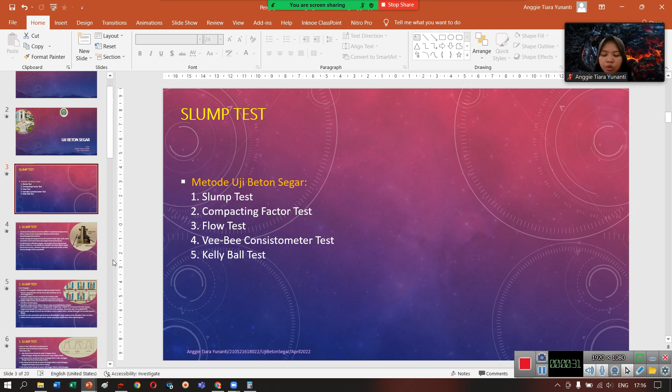Untuk pengujian yang pertama yaitu slump test. Slump test ini merupakan salah satu pengujian yang dapat digunakan untuk pengujian kemampuan kerja dari campuran beton yang baru dan dapat dilakukan di lokasi kerja, lapangan, atau laboratorium.

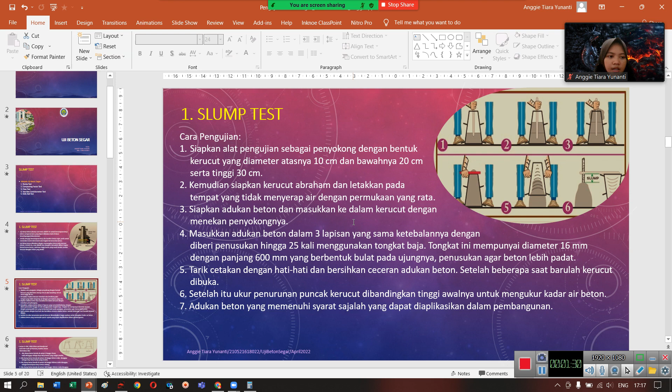Untuk prosedur dari pengujian slump test ini dapat dimulai dengan mempersiapkan alat seperti kerucut Abrams, tongkat besi, dan juga meteran. Setelah mempersiapkan peralatan yang dibutuhkan, kemudian campuran dari beton yang baru dimasukkan ke dalam kerucut Abrams hingga permukaan atas. Namun ketika campuran beton mencapai ketinggian 1/3, 2/3, dan 3/3, maka dilakukan pemadatan menggunakan tongkat besi sebanyak 25 kali. Setelah mencapai permukaan dan setelah diratakan, kerucut Abrams kemudian diangkat dan hasil dari slump beton tersebut kemudian diukur menggunakan meteran terhadap kerucut Abrams, ketinggian kerucut Abrams.

Kemudian untuk yang selanjutnya adalah kualitas dari beton itu ditentukan sesuai dengan IS 456-2000 atau Plain and Reinforced Concrete Code of Practice, di mana kriteria dari kualitas beton tersebut ditentukan menjadi 4.

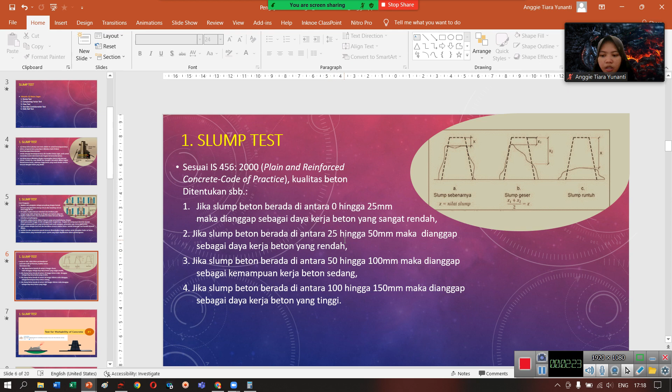Untuk yang pertama adalah jika slump beton berada di antara 0 hingga 25 mm, maka dianggap sebagai daya kerja beton yang sangat rendah. Untuk yang kedua adalah jika slump beton berada di antara 25 hingga 50 mm, maka dianggap sebagai daya kerja beton yang rendah. Kemudian yang ketiga adalah jika slump beton berada di antara 50 hingga 100 mm, maka dianggap sebagai kemampuan kerja beton sedang. Dan yang terakhir adalah jika slump beton berada di antara 100 hingga 150 mm, maka dianggap sebagai daya kerja beton yang tinggi. Kemudian yang selanjutnya ada video mengenai uji slump test pada beton.

Concrete slump test. Concrete slump test ini berarti pengujian slump test pada beton. Concrete itu beton, slump test itu slump test.

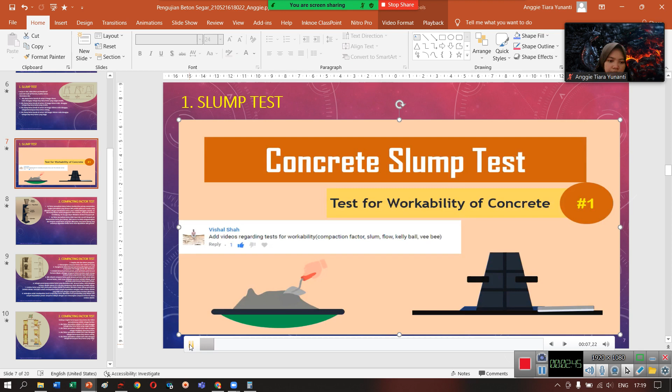Slump test is the most commonly used method of measuring the consistency of concrete work where the nominal maximum size of the aggregate does not exceed 38 millimeters.

This method can be employed either in the laboratory. Nah, jadi slump test ini bisa dilakukan di laboratorium atau di lokasi pekerjaan.

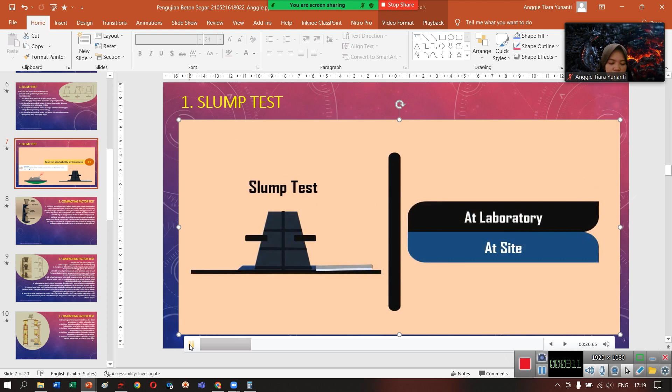Apparatus required for slump test. The mold for the test specimen is in the form of the frustum of a cone having the bottom diameter of 20 centimeters, top diameter 10 centimeters, and height of the cone is 30 centimeters. Jadi mold itu berarti cetakan, di mana cetakannya ini merupakan kerucut Abrams, di mana diameter dari sisi atasnya merupakan 10 cm, untuk diameter pada sisi bawahnya adalah 20 cm, dan ketinggian dari kerucutnya adalah 30 cm.

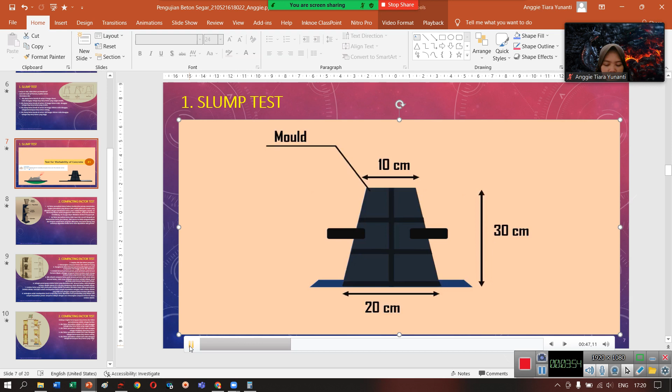A metal plate of thickness 1.6 mm is used as a base. Kemudian metal plate ini dilakukan sebagai base atau dasar, di mana kerucut Abrams ini untuk menguji slump test memerlukan permukaan yang rata dan tidak menyerap air, sehingga digunakan metal plate dengan ketebalan 1,6 mm.

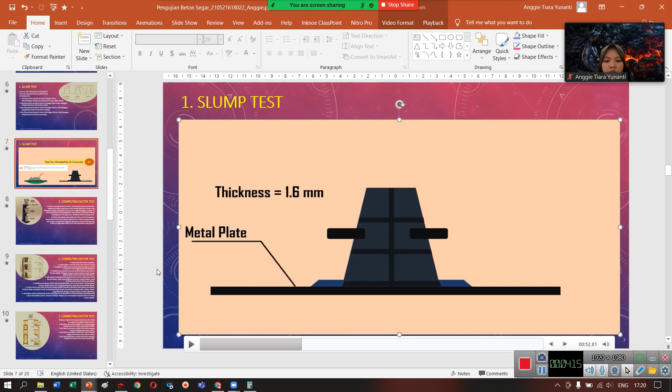A tamping rod of 16 mm diameter and 0.6 meters long is used. Kemudian ini adalah wujud dari tongkat besi, di mana tongkat besinya memiliki panjang 0,6 meter dan diameter sebesar 16 mm.

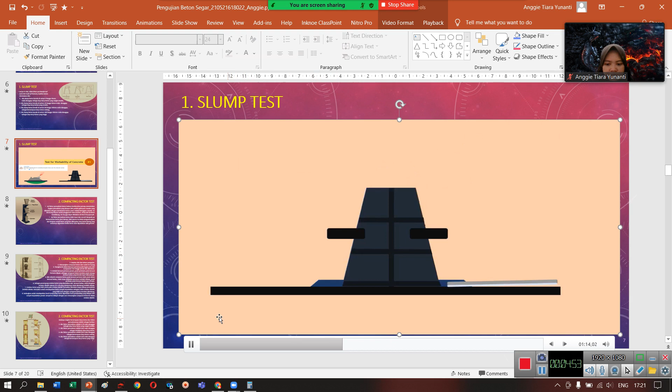Let us now see the step-by-step procedure for concrete slump test. The internal surface of the mold should be thoroughly cleaned and freed from moisture and any set concrete before commencing the test. Sebelum kerucut Abrams digunakan, perlu dibersihkan terlebih dahulu.

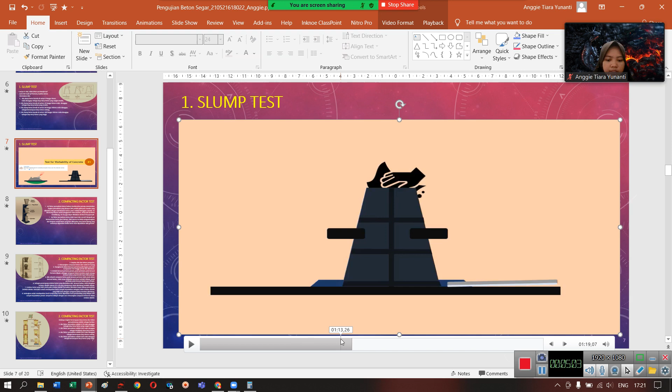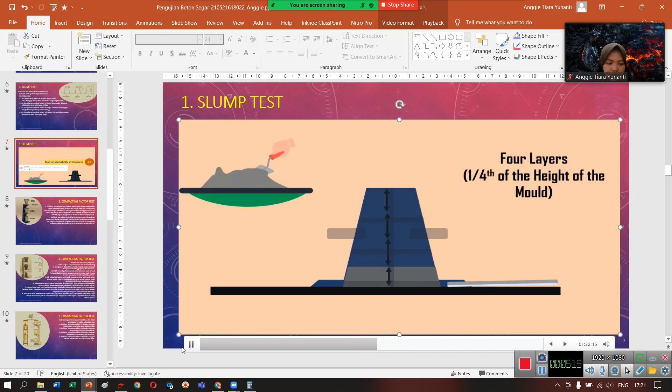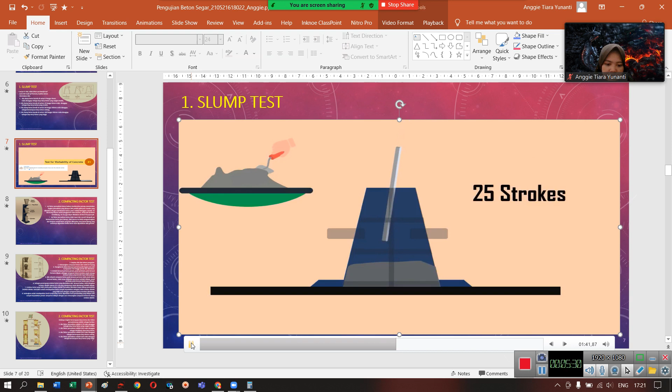The mold is placed on the smooth metal plate. The mold is filled in 4 layers, each approximately 1/4 of the height of the mold. Each layer should be tamped with 25 strokes with tamping rod, such that the strokes are distributed over the cross section. Dilakukan pemadatan sebanyak 25 kali. After the top layer is filled, the concrete is struck off level.

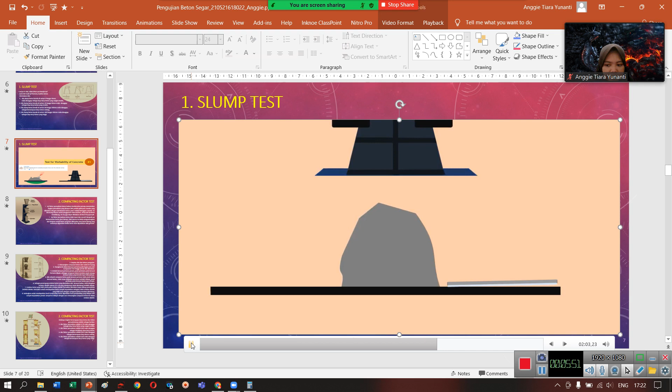The mold should be removed from the concrete by slowly raising in the vertical direction. Now, you will notice concrete tends to subside. This subsidence is referred as slump of concrete. Hasil dari pengukuran. This slump value is then measured by the difference of the height of the mold and that of the highest point of the specimen. This difference in height is taken as slump of concrete.

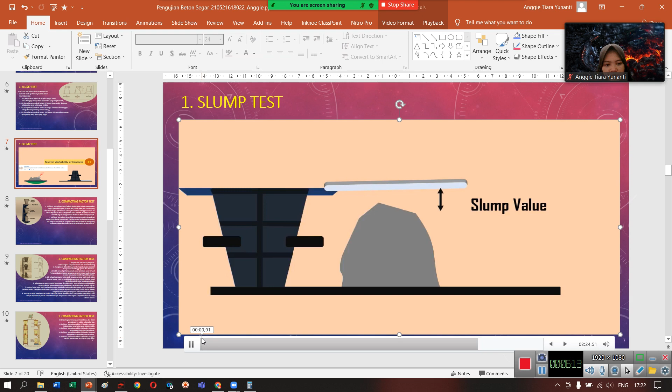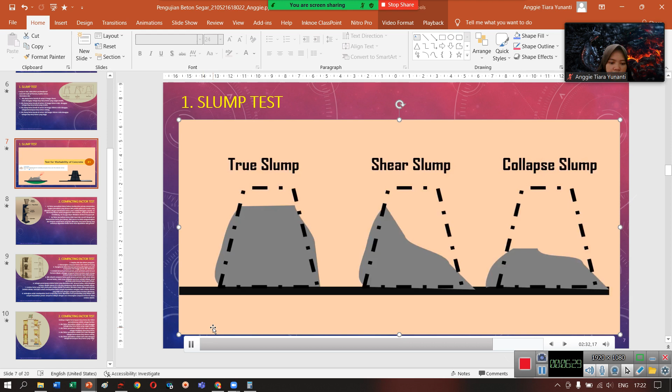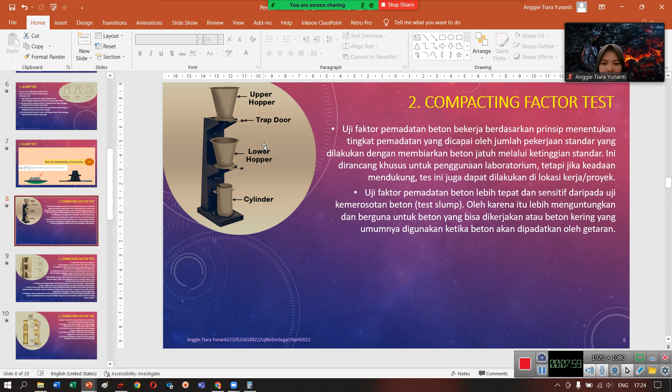Jadi alat dari compacting factor test ini seperti gambar di pojok kiri atas yang terdiri dari upper hopper, trapdoor, lower hopper, dan silinder. Pengujian akan dilakukan sebanyak 3 kali, dimulai dari memasukkan campuran beton ke dalam upper hopper, kemudian trapdoornya akan dibuka, betonnya akan jatuh kepada lower hopper, kemudian trapdoornya akan dibuka lagi dan masuk ke dalam silinder.

Yang selanjutnya adalah deskripsi tingkat kemampuan kerja beton dan faktor pemadatannya. Pertama, jika faktor pemadatan adalah 0,78 maka dianggap sebagai daya kerja beton yang sangat rendah. Kedua, jika faktor pemadatan adalah 0,85 maka dianggap sebagai rendahnya daya kerja beton. Ketiga, jika faktor pemadatan adalah 0,92 maka dianggap sebagai kemampuan kerja beton sedang. Dan terakhir, jika faktor pemadatan adalah 0,95 maka dianggap sebagai kemampuan kerja beton yang tinggi.

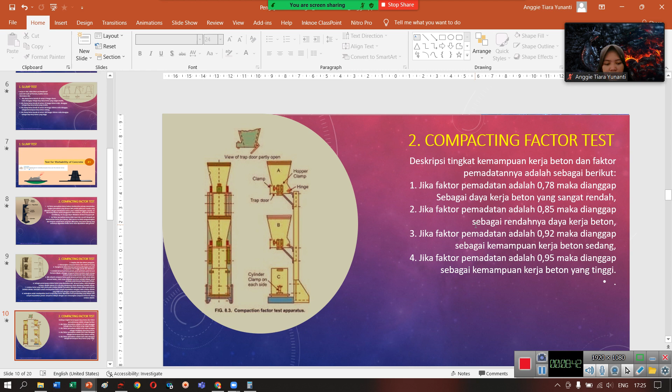Untuk yang selanjutnya adalah video mengenai pengujian menggunakan compacting factor test.

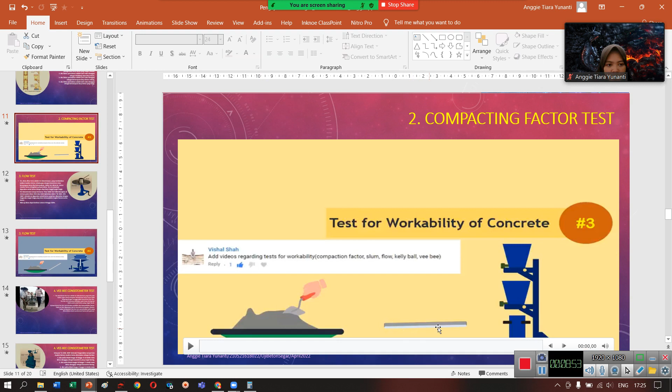Compaction factor test for concrete. The compaction factor test is designed generally for use in the laboratory, sometimes used in sites. Jadi, compacting factor test ini bisa dilakukan di laboratorium atau di lokasi pekerjaan.

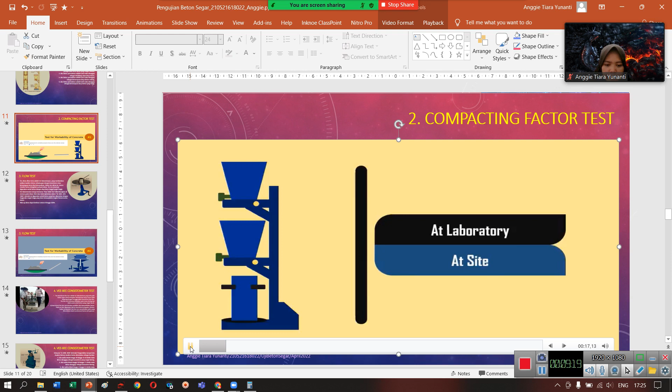This test has an advantage of using this method for concrete mixes of very low workability.

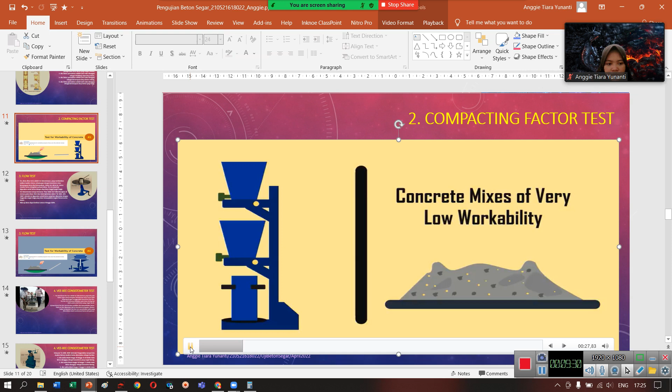The compaction factor apparatus consists of the upper hopper of dimensions: top internal diameter 25.4 centimeters, bottom internal diameter 12.7 centimeters, and internal height 27.9 centimeters. Jadi untuk hopper yang paling atas ini memiliki diameter atasnya 25,4 cm dan diameter bawahnya adalah 12,7 cm, untuk tingginya adalah 27,9 cm.

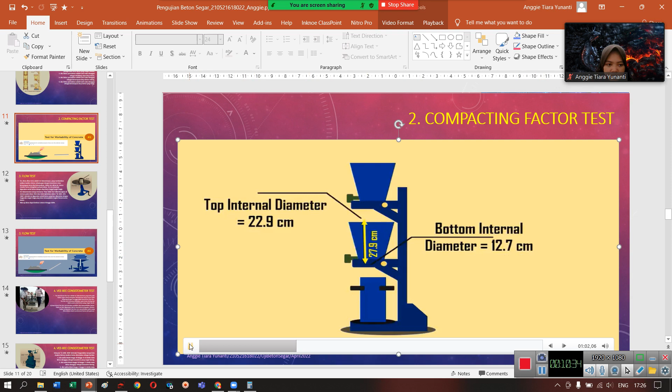A fixed lower hopper of dimensions: top internal diameter 22.9 centimeters, bottom internal diameter 12.7 centimeters, and internal height 22.9 centimeters. Untuk hopper yang di bawahnya ini memiliki diameter atas sebesar 22,9 cm dan diameter bawah sebesar 12,7 cm, sedangkan tingginya adalah 27,9 cm.

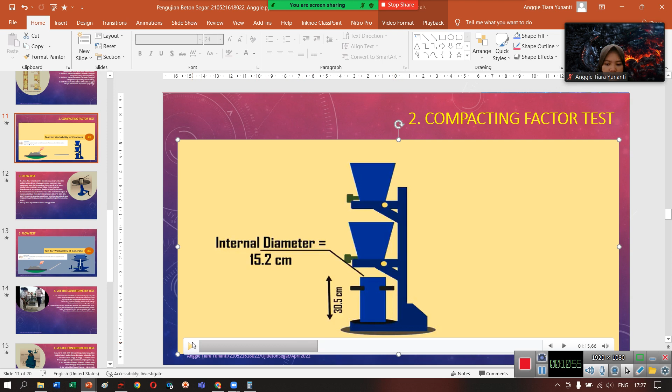And a cylinder of internal diameter 15.2 centimeters and internal height 30.5 centimeters. Untuk diameter dari silindernya sendiri adalah 15,2 cm, sedangkan tingginya adalah 30,5 cm.

The distance between upper and lower hoppers, and lower hopper and cylinder, is 20.3 centimeters.

Procedure: the sample of concrete to be tested is placed in the upper hopper up to the brim. Jadi prosedur dimulai dengan memasukkan campuran betonnya ke dalam upper hopper sampai penuh.

The trap door is opened so that the concrete falls into the lower hopper. Kemudian trapdoornya dibuka sehingga campuran betonnya masuk ke dalam lower hopper.

Then the trapdoor of the lower hopper is opened and the concrete is allowed to fall into the cylinder. Jadi, trapdoor untuk yang lower hopper kemudian dibuka sehingga campuran dari betonnya masuk ke dalam silinder.

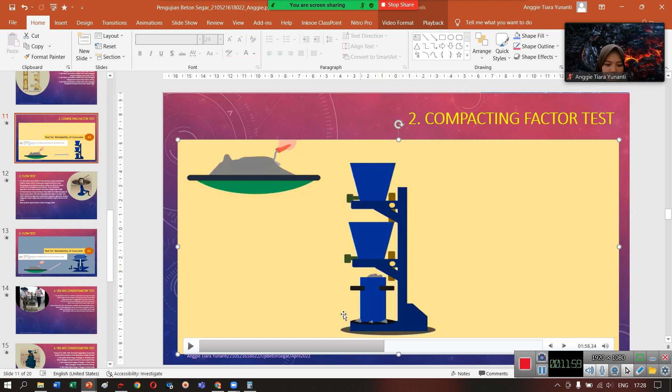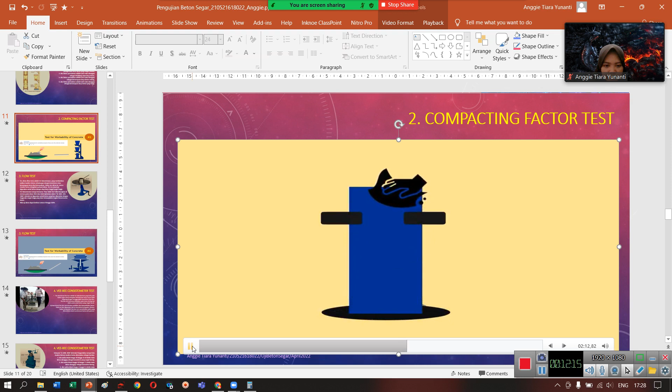The excess concrete in the cylinder is leveled. The outside of the cylinder is wiped clean. Now, the cylinder filled with concrete is weighed.

Jadi sebelum dilakukan pengujian ini, silindernya terlebih dahulu ditimbang untuk mengetahui beratnya. Kemudian setelah dilakukan pengujian, silinder dan campuran beton yang masuk ke silinder ini ditimbang, dan weight is known as the weight of partially compacted concrete.

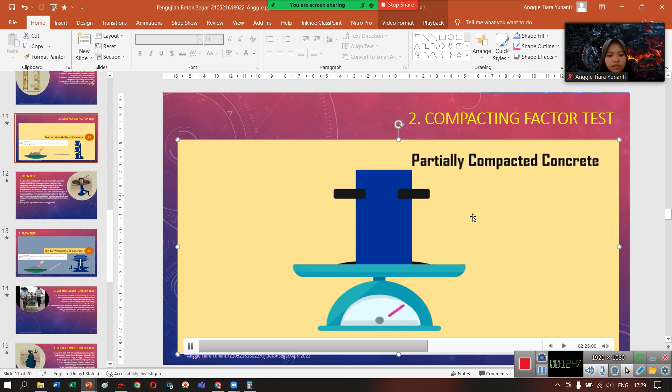Then, empty and clean the entire cylinder. Setelah ditimbang, beton yang masuk ke dalam silinder tadi dikeluarkan kembali dan kemudian diisi dengan campuran beton yang baru hingga silinder penuh.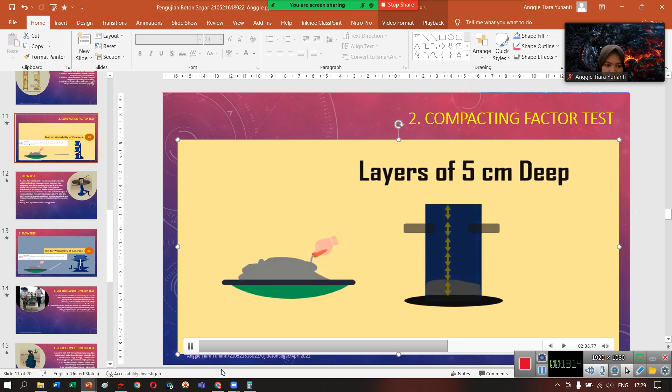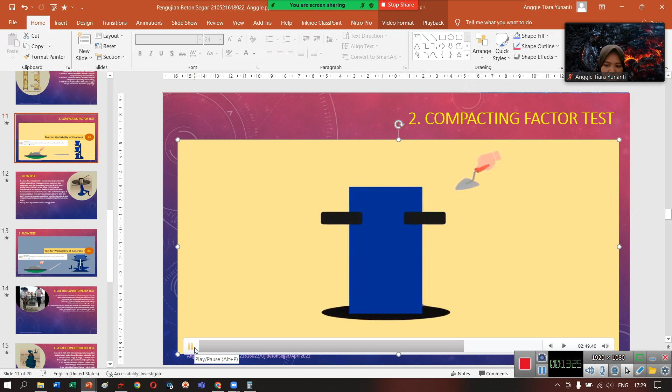Now, fill the cylinder with concrete in layers where each is approximately 5 centimeters deep. Once fully filled, the top surface is leveled off. The outside of the cylinder is wiped.

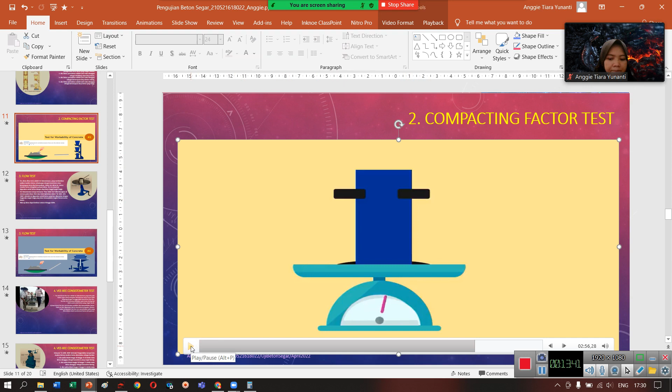Now, weigh the cylinder. Kemudian, setelah penuh, silinder yang berisi penuh dengan campuran beton ini ditimbang kembali. Weight is known as the weight of fully compacted concrete.

The compaction factor is equal to the ratio of the weight of partially compacted concrete to the weight of fully compacted concrete. Jadi compaction factor ini merupakan hasil dari berat pengujian beton silinder yang sebelumnya dilakukan dibagi terhadap berat silinder dengan beton yang penuh.

With the help of the compaction factor value, the degree of workability is calculated with the help of the table. Nah, ini merupakan klasifikasi.

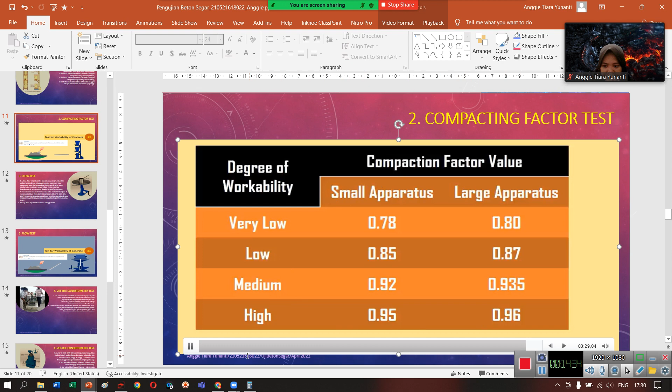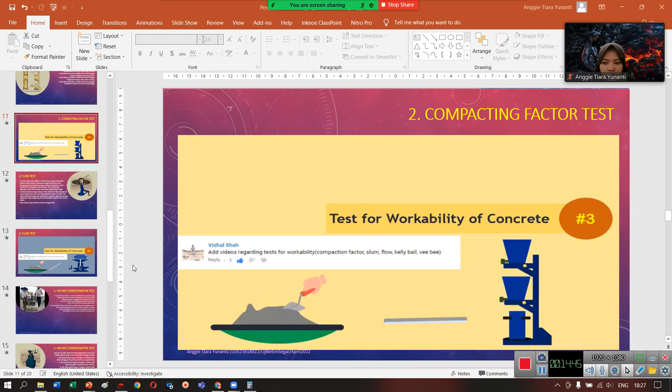Untuk yang selanjutnya yaitu pengujian ketiga, flow test, di mana flow test ini merupakan tes laboratorium yang memberikan indikasi kualitas beton sehubungan dengan konsistensi atau kemampuan kerja dan keterpaduan.

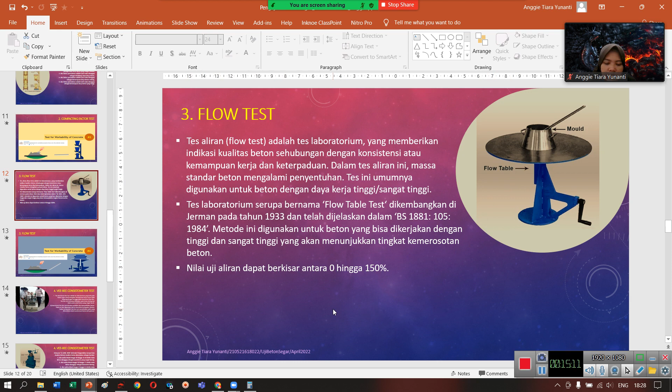Nilai uji dari tes flow test ini adalah antara 0 hingga 150%. Berikut merupakan video dari pengujian menggunakan flow test.

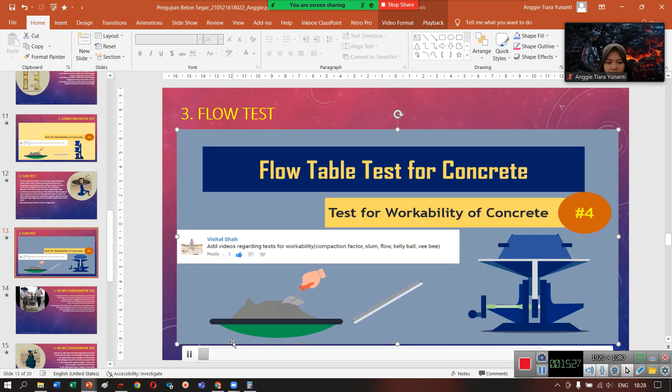Flow table test for concrete is generally done in the laboratory to determine the fluidity of concrete. Jadi flow test ini biasanya dilakukan di laboratorium.

The apparatus consists of molds made of smooth metal casting, in the form of a frustum of a cone with internal dimensions of 25 cm base diameter, 17 cm upper surface diameter, and height 12 cm. Jadi untuk mold atau cetakannya, diameter permukaannya adalah 17 cm, diameter dasarnya adalah 25 cm, sedangkan tingginya adalah 12 cm.

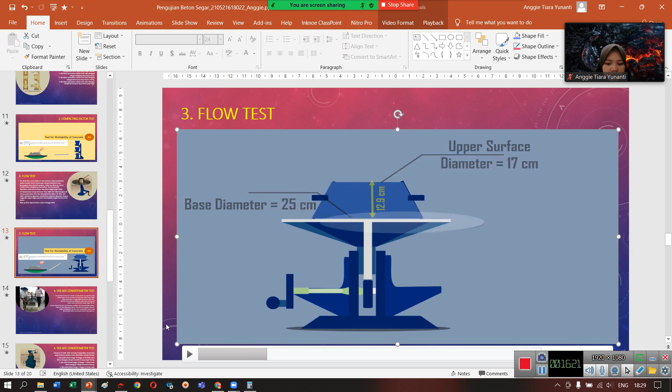And the flow table is about 76 cm in diameter, over which concentric circles are marked. Jadi untuk flow table tadi memiliki diameter 76 cm.

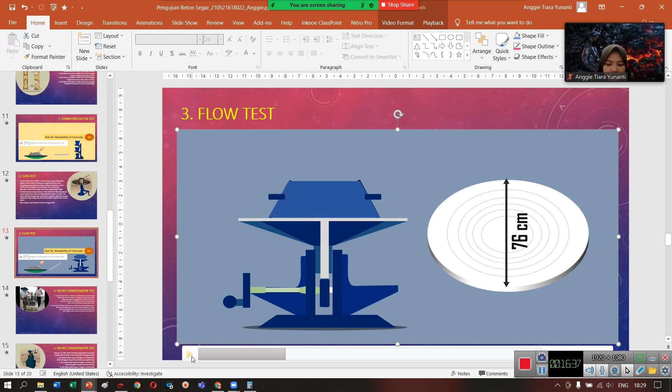Let's now see the step-by-step procedure to do this test. The tabletop is cleaned of all gritty material and is wetted. Jadi yang pertama adalah membersihkan flow table sebelum melakukan pengujian.

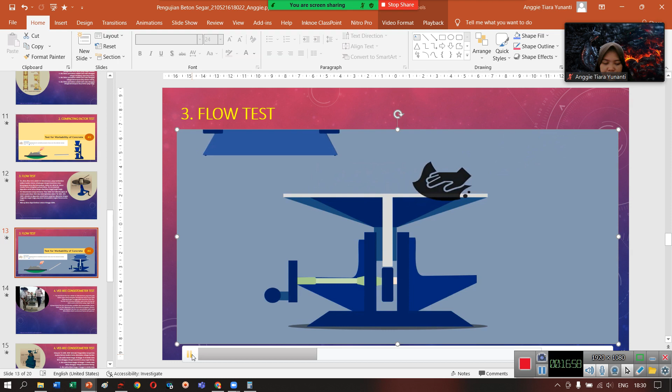The mold is placed in the center of the table. Kemudian meletakkan mold ini di tengah-tengah dari flow table.

Firmly held and filled in 2 layers. Kemudian memasukkan campuran beton ke dalam mold atau cetakan. Each layer is rodded 25 times with a tamping rod. Cara memasukkannya yaitu jika ketinggian dari campuran betonnya mencapai setengah dari ketinggian moldnya, maka dilakukan pemadatan sebanyak 25 kali menggunakan tongkat besi. After fully filled, the excess concrete is leveled off.

Now, lift the mold vertically upward. You will notice concrete stands in the shape of the mold. Kemudian kerucutnya diangkat. The table is then raised and dropped 12.5 mm, 15 times in about 15 seconds. Jadi alatnya dinyalakan sehingga menghasilkan getaran, di mana getarannya adalah 15 kali dalam 15 detik.

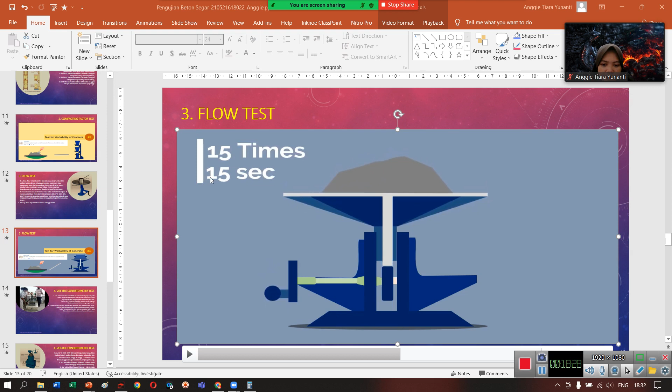The diameter of the concrete spread is measured in about 6 directions to the nearest 5 mm and the average spread is noted. Jadi cara menghitungnya yaitu bentuk akhir dari campuran beton yang telah dilakukan getaran kemudian dibagi menjadi 6, kemudian dihitung diameter luarnya berapa, diameter totalnya dikurangi dengan diameter luarnya, maka didapatkan diameter dari campuran betonnya.

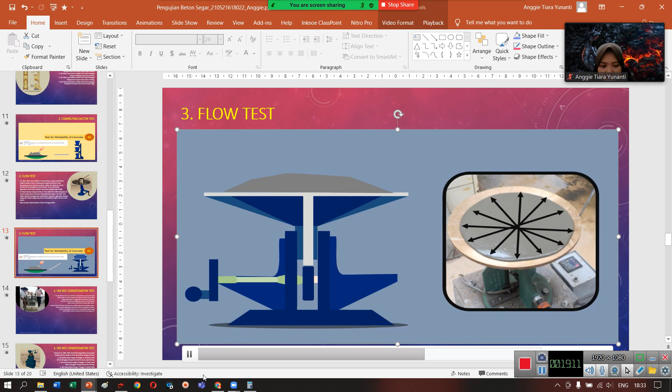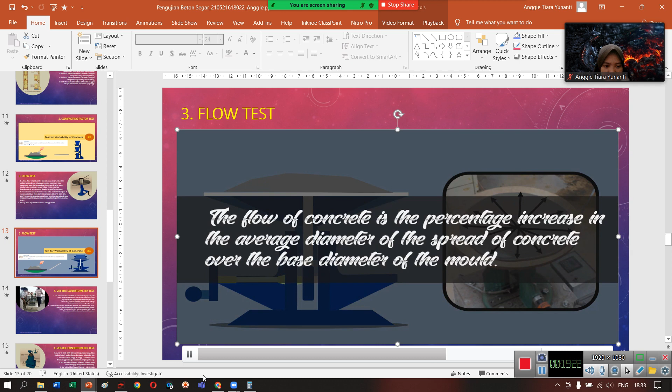The flow of concrete is the percentage increase in the average diameter of the spread of concrete over the base diameter of the mold. Flow in percent is calculated by dividing spread diameter in centimeters minus 25, divided by 25, into 100. Jadi hasil dari flow test ini sama dengan diameter total dari campuran betonnya tadi dikurangi dengan 25, dibagi 25, dikalikan 100.

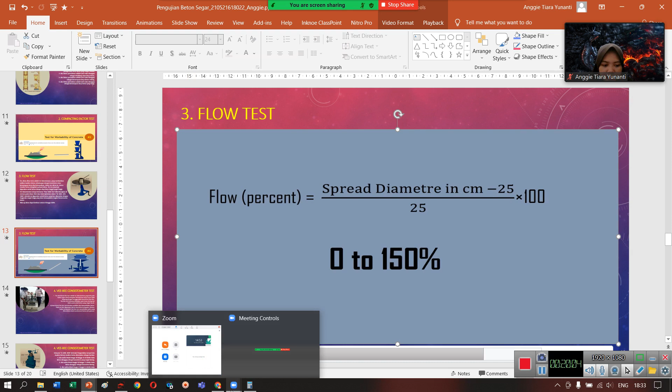Thus, the value of flow percent is calculated from 0 to 150%. Nanti akan menghasilkan angka antara 0 sampai 150%. A close look at the pattern of spread of concrete can also give a good indication of the characteristics of concrete, such as the tendency for segregation.

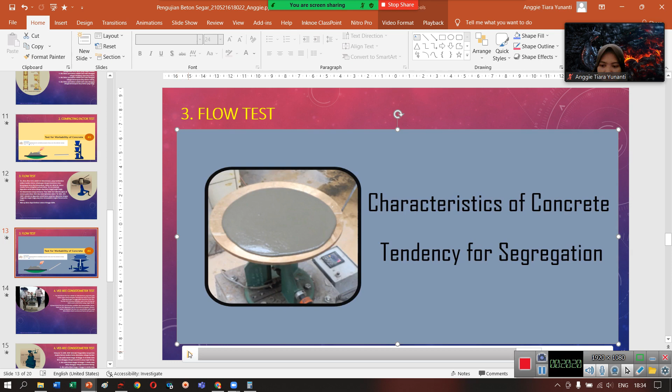Kemudian untuk yang selanjutnya ada Vee-Bee consistometer test, di mana tes konsistensi Vee-Bee adalah tes laboratorium yang baik pada beton segar yang digunakan untuk mengukur kemampuan kerja secara tidak langsung dengan menggunakan konsistensi Vee-Bee. Vee-Bee test biasanya dilakukan pada beton kering dan tidak cocok untuk beton yang sangat basah, di mana uji konsistensi Vee-Bee ini digunakan untuk menentukan mobilitas dan kompatibilitas beton.

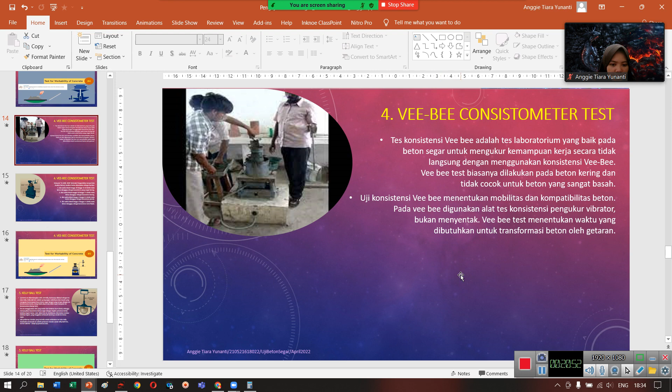Yang selanjutnya adalah kualitas beton yang ditentukan menurut IS 1199-1959, metode pengambilan sampel dan analisis beton. Jika waktu lebah hingga 20 hingga 15 sampai 10 detik, maka beton dianggap sebagai konsistensi yang sangat kering. Jika waktu lebah hingga 10 hingga 7 sampai 5 detik, maka beton dianggap sebagai konsistensi kering. Jika waktu lebah hingga 5 hingga 4 sampai 3 detik, maka beton dianggap sebagai konsistensi plastik. Dan yang terakhir, jika waktu lebah hingga 3 hingga 2 sampai 1 detik, maka beton dianggap sebagai konsistensi semi fluida.

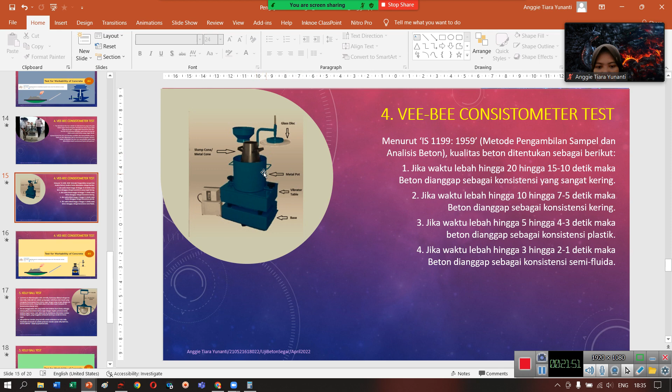Untuk alat dari Vee-Bee consistometer test ini terdiri dari glass disc, slump cone atau metal cone, metal pot, vibrator table, dan base. Kemudian selanjutnya adalah video mengenai pengujian Vee-Bee.

Vee-Bee consistometer test for concrete. Vee-Bee consistometer test is used to determine the mobility and compactability of concrete. Jadi Vee-Bee consistometer test ini digunakan untuk menguji mobilitas dan kompatibilitas dari beton.

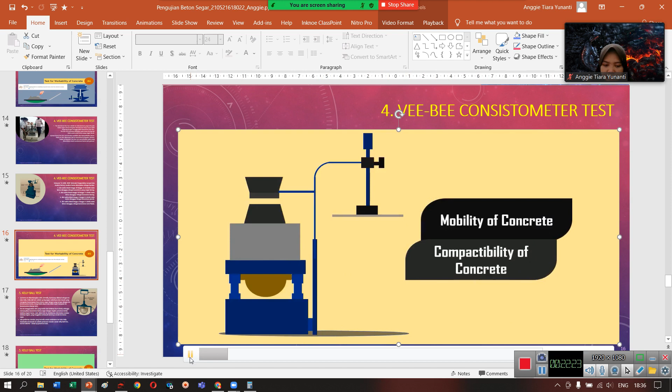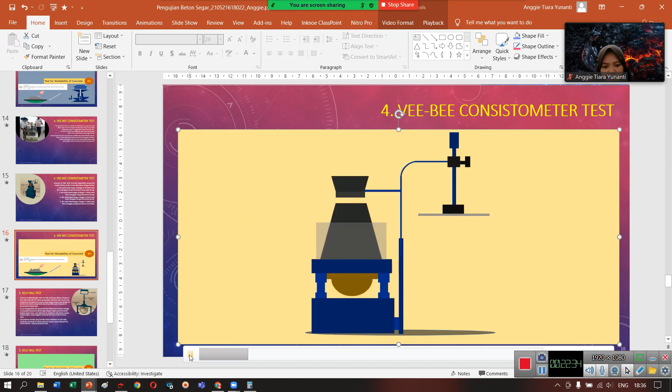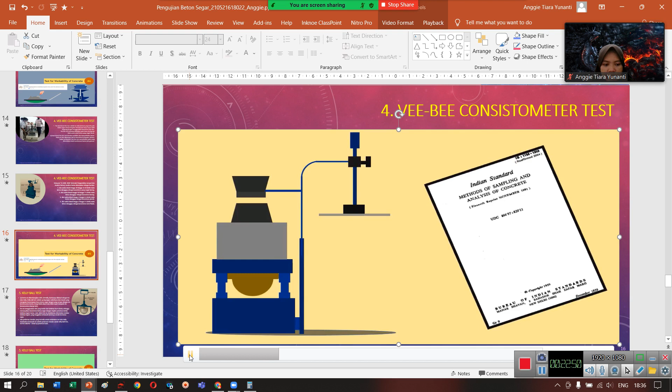The Vee-Bee consistometer test consists of a vibrator table resting upon elastic supports, a metal pot, a sheet metal cone open at both ends, and a graduated rod connected with a glass disc. The entire setup is shown on the screen. The dimensions of the various shapes are designed based on IS 1199-1959. Today, we are not going to concentrate on dimensions. Let us now start with the procedure. Place the slump cone inside the cylinder.

Sebelumnya slump cone ini ditaruh di dalam silinder yang ada di sini, kemudian dimasukkan campuran beton. Fill the concrete in 4 layers. Jadi pengisian dari kerucut betonnya ini dilakukan sebanyak 4 kali, di mana ketika ketinggian dari campuran betonnya mencapai 1/4 dilakukan pemadatan.

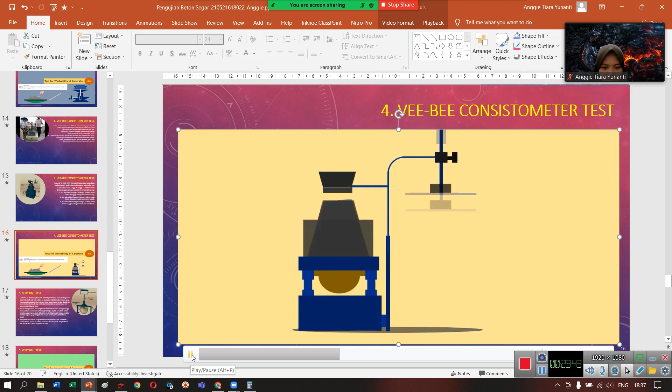1/4 of cone height and tamper the surface 25 times. Once filled, struck off the excess concrete. Move the glass disc attached to the swivel arm and place it on the slump cone such that it touches the top of the concrete level.

Note down the reading in the graduated rod. Jadi untuk glass disc-nya kemudian diarahkan ke permukaan dari cone-nya, kemudian dilihat skala yang ada pada alat.

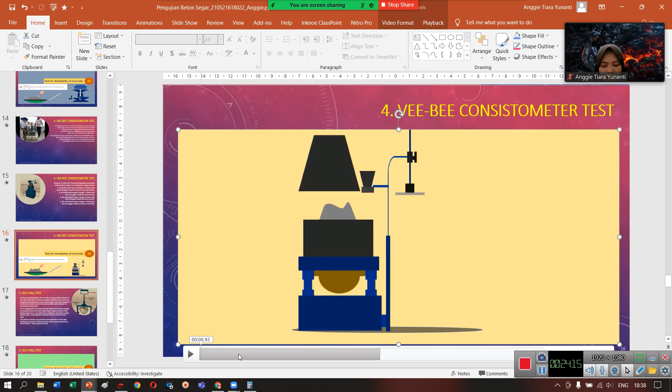Next, remove the cylindrical cone by raising the cone slowly in the vertical direction. Kemudian melepaskan cone-nya.

Again, place the glass disc and determine the reading. Kemudian menempatkan si glass disc-nya ini ke atas dari permukaan beton yang telah dilepaskan dari cone, kemudian melihat skalanya yang ada pada alat.

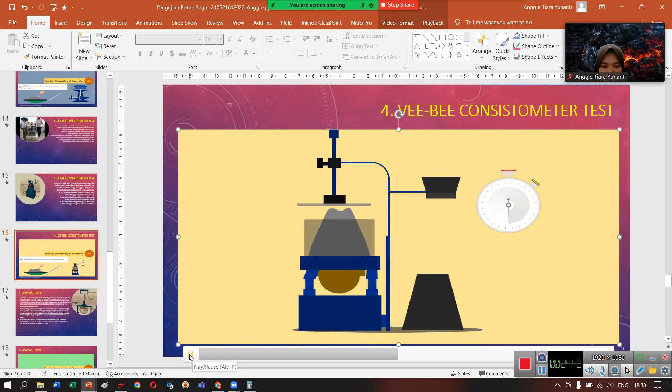Now, switch on the electrical vibrator and at the same time switch on the stopwatch. Jadi kemudian alat vibratornya dinyalakan dan sambil menghitung menggunakan stopwatch.

Concrete will start to spread in the cylinder container. Continue the vibration until the concrete is remolded and the surface of the concrete becomes horizontal. Jadi pengujian ini, penghitungan waktu dilakukan sampai permukaan beton yang ada pada silinder ini menjadi horizontal atau rata.

Stop the vibration and stopwatch. Kemudian menghentikan stopwatch untuk melihat waktu. The time in the stopwatch denotes the workability of concrete, expressed in Vee-Bee seconds.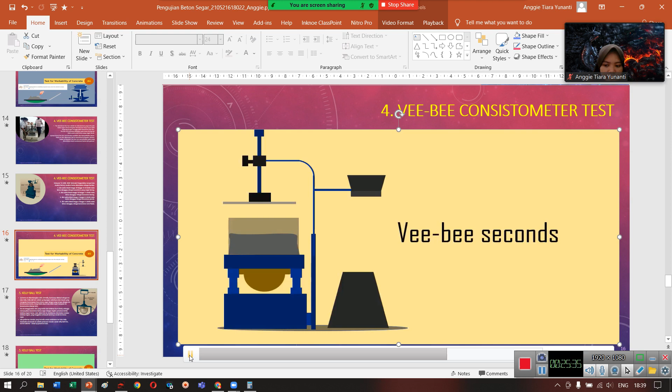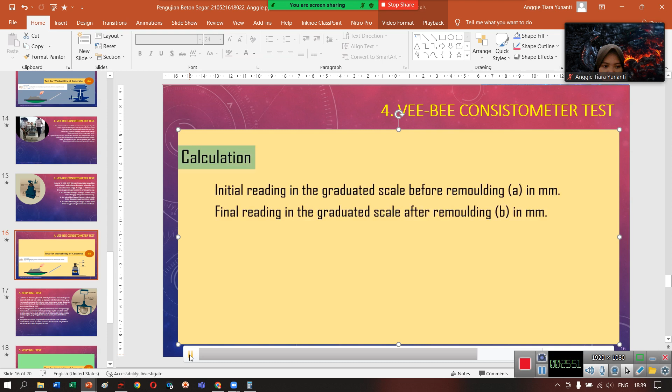Calculations in Vee-bee consistometer. Initial reading in the graduated scale before remolding is A. Final reading in the graduated scale after remolding is B. Slump value is equal to A minus B.

Jadi nilai dari slumpnya ini A dikurangi B dalam milimeter, di mana A ini adalah skala yang tertera pada alat ketika pengukuran dilakukan pada saat konnya belum diangkat. Kemudian yang B adalah pada slump yang sudah diangkat.

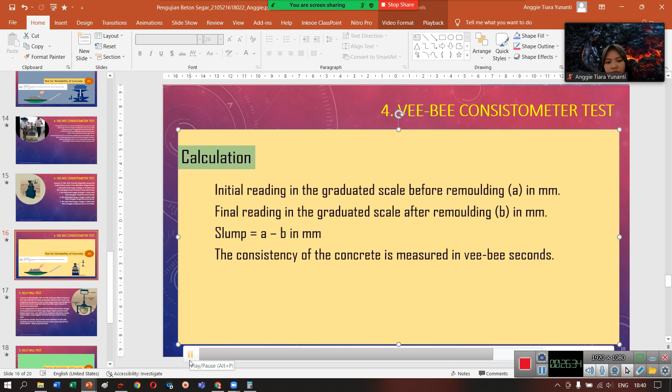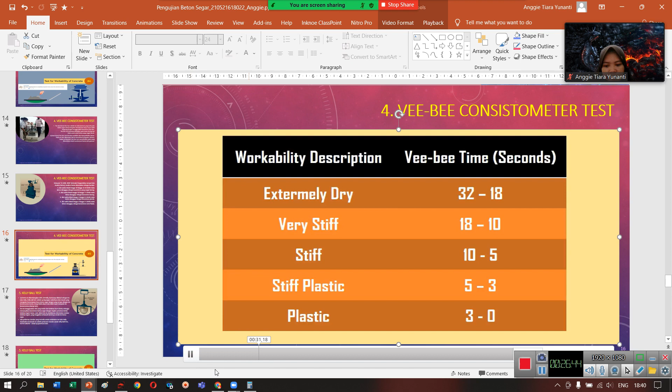And the consistency of the concrete is measured in Vee-bee seconds. The workability conditions with respect to Vee-bee time are displayed on the screen. Thank you for watching. Stay tuned.

Kemudian untuk yang terakhir ada Kelly ball test, di mana tes ini dikembangkan oleh J.W. Kelly yang kemudian dikenal sebagai tes bola Kelly.

Kelly ball test adalah uji lapangan sederhana dan mudah yang mengukur kemampuan kerja beton segar, serupa dengan tes kemerosotan beton, tetapi lebih akurat dan lebih cepat daripada slump test.

Jadi tes Kelly ball ini menggunakan alat, di mana alatnya ini terdiri dari handle, graduated scale, hemisphere ball, dan satu lagi frame.

Yang selanjutnya adalah video cara pengujian menggunakan Kelly ball test.

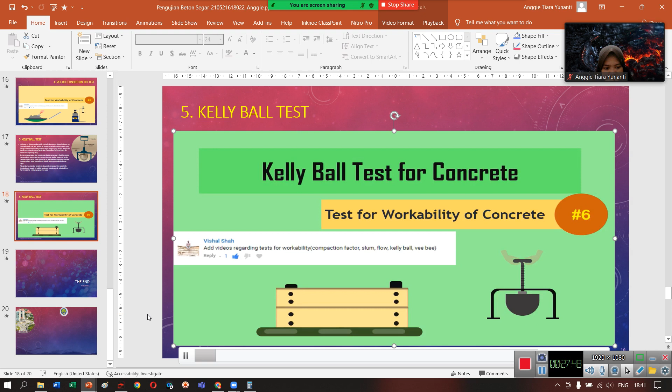Kelly ball test for concrete. Kelly ball test is a simple type of field test used for determining the workability of concrete. Jadi Kelly ball test ini adalah sebuah pengujian yang tujuannya adalah untuk menguji workabilitas dari beton.

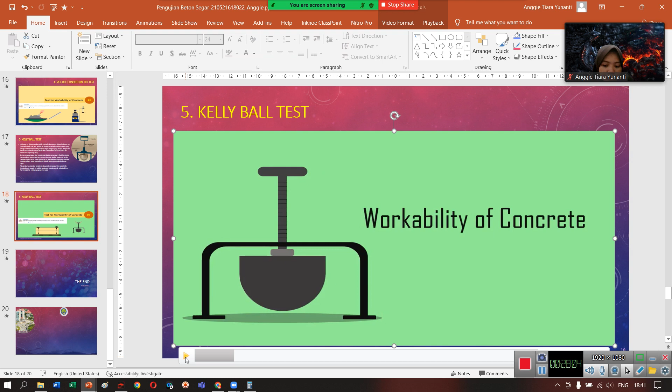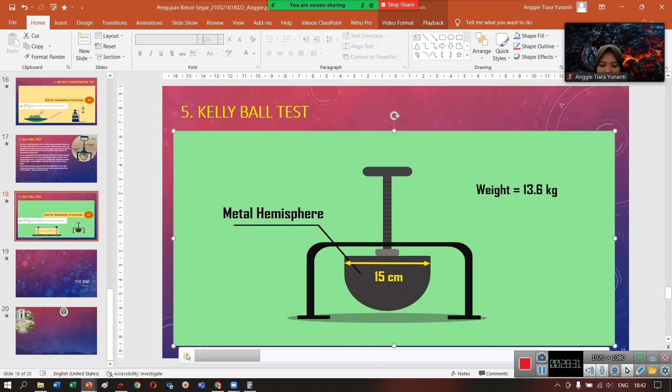The apparatus consists of a 15 cm diameter metal hemisphere weighing 13.6 kilograms. Jadi untuk metal hemisfernya ini memiliki diameter sebesar 15 cm dan berat sebesar 13,6 kg, yang attached to the graduated stem with handle.

The entire setup slides through a frame which is made to rest on the fresh concrete. The concrete sample is taken in the container such that the minimum depth of concrete must be at least 20 centimeters and the minimum distance from the center of the ball to the nearest edge of the concrete should be 23 centimeters.

Jadi pengujian ini dilakukan dalam sebuah wadah yang sekiranya cukup besar, di mana campuran betonnya ini harus memiliki ketinggian setinggi 20 cm, sedangkan jarak dari pengujian menggunakan Kelly ball test ini 23 cm terhadap sisi kanan dan kiri dari kontainer.

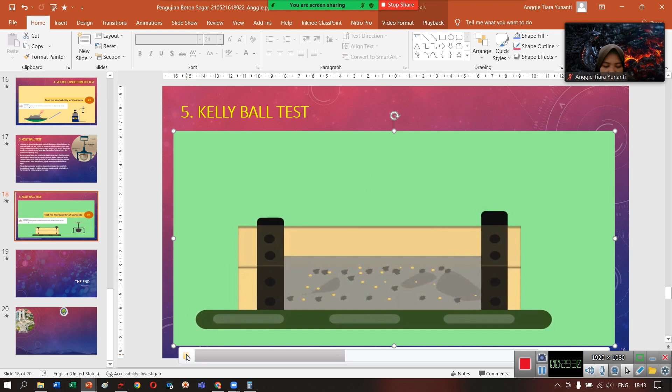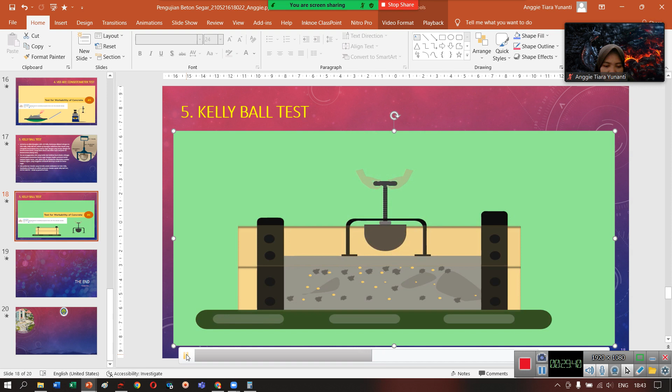Once the concrete is filled, the surface of the concrete is leveled off. The setup is kept on the concrete by holding the handle of hemisphere such that the frame touches the surface of the concrete.

Now, the ball is released on the surface of the concrete. Jadi pengujian dilakukan dengan melepaskan handle-nya, kemudian si hemisfernya akan jatuh ke dalam campuran beton.

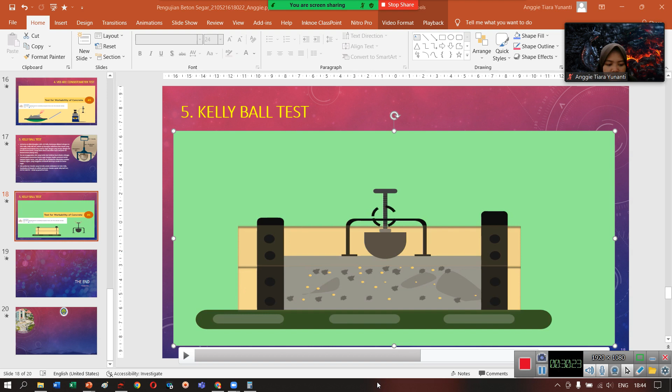The depth of penetration is read immediately on the stem to the nearest 6 millimeters. Hasil yang diperoleh dapat dilihat pada graduated scale.

Similarly, another two measurements are made on the same sample and the average is taken as the slump value. Jadi pengujian tidak hanya dilakukan pada titik itu saja, juga pada titik-titik lain sehingga didapatkan nanti rata-rata yang menjadi nilai slump.

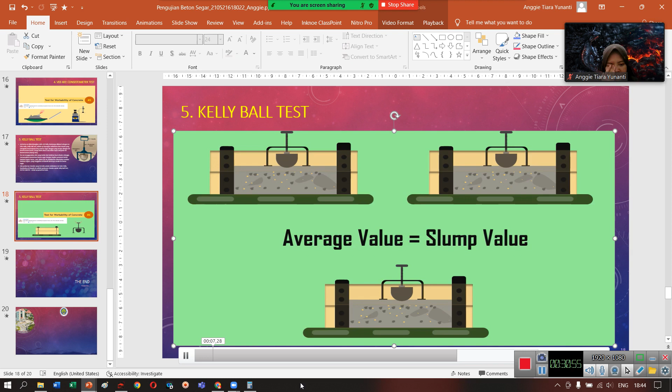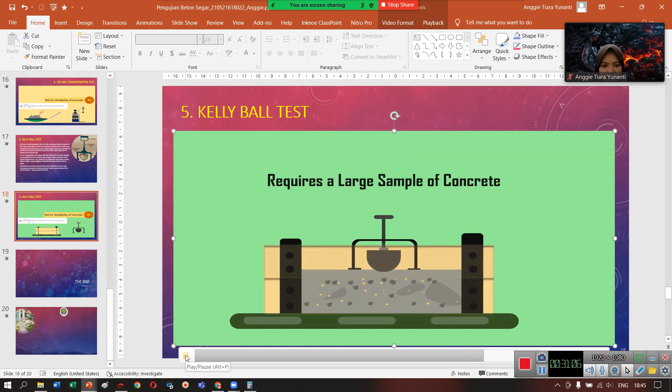The advantages of this test are that it can be performed on the concrete placed on site and gives greater precision than slump test. The disadvantages are that it requires a large sample of concrete and it cannot be used when the concrete is placed in a thin section.

Thank you for watching. Stay tuned. The best is yet to come.